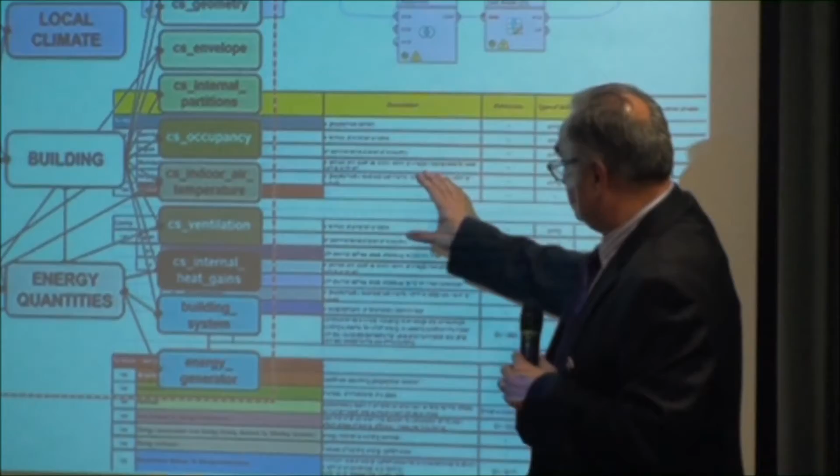Okay, this is just really to confuse you—to confuse you. This is the table where all the data is organized. We then semantically link this data through different ways and methods.

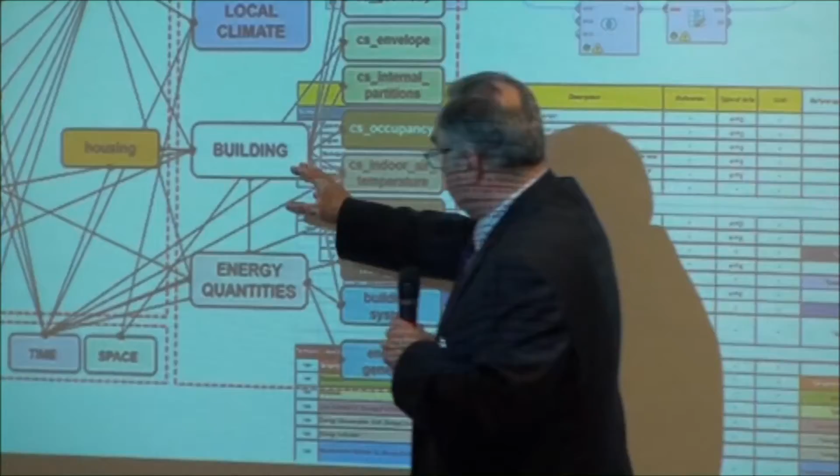So basically, for example, you've got the heart, the building. A building will have different geometries, different things inside it, different boilers, etc., that link here. This could be part of housing, which could be linked to data in terms of cost, population, etc. So the emphasis is on organizing the data first, and then there's an ontology editor that can put the data in and link it semantically.

So just to give you a quick example on the scope of input data required for estimation of SAP CO2 emission, for EPC rating—this is some of the work we did in Riverside Dean. For example, for all the houses, a typical property will have building geometry, different roof areas, height, etc. You calculate exposed wall areas, etc. We have more information like the age, boiler efficiency, location—so all of this is data that could be available somewhere.

For example, the boiler efficiency, the type of boilers, the property age, that will give me lots of knowledge about, for example, the type of walls that has been built, and building geometry and other areas.

So all of this really goes to something we call the ontology editor, which is what we call an ontology engineer that links the data together with the help of energy efficient engineers, or with the help of construction people, so these can be linked together.

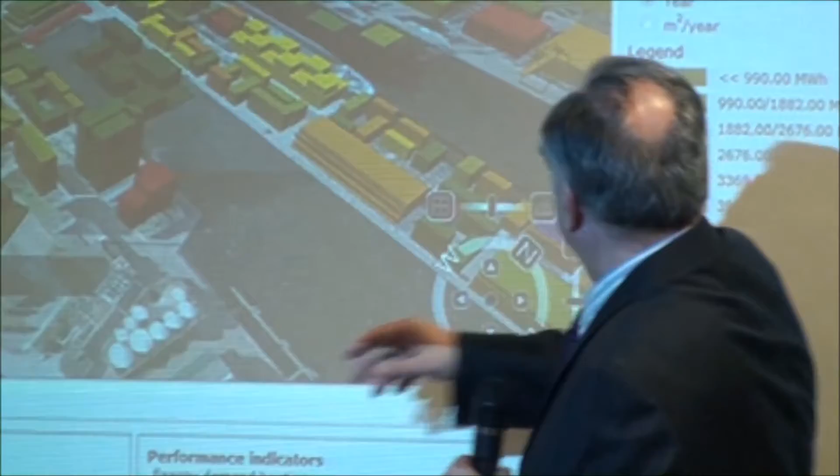This is in Copenhagen. You can see here, these are different objects, the buildings. The color will reflect, as you can see here, the megawatt hours in terms of energy, and you can highlight the high energy usage and how you're going to compare this. And therefore you can have different information, different graphs, and therefore you can have different strategies for reduction.

This is the Riverside Dean. Maybe David is going to talk more about this, but just to give you an idea, this is our LIDAR maps that we commissioned. There is the biomass plant in the middle here. Probably some of you will recognize this, and that's supposed to serve a number of Newcastle Park developments, in terms of the brewery, the Newcastle General Hospital.

That was the plan, but then we cleaned the data. We did lots of cleaning of the data. Some 3D models were developed. We've got some open source data that we developed from reading the LIDAR in terms of footprint. We purchased some master maps from Ordnance Survey. So there's lots of work being done.

The idea is to see how much we could capture data without having people involved and engaged all the time, so capture the data, put it somewhere in a public repository so somebody else might be able to use it. As you can see, lots of cleaning of the data, lots of modeling that we've done.

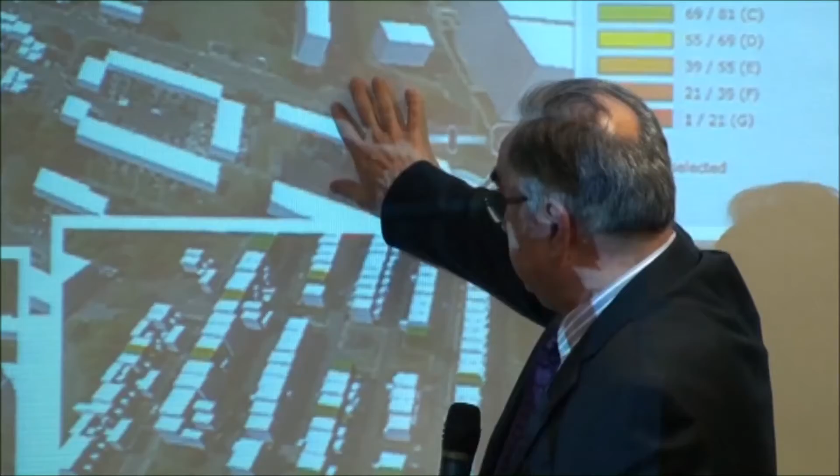So that is probably some of the intervention that we did. We had a bit of problems in terms of rating. We did some interventions, and as you can see, things turning green. Now, these interventions really, there's lots of cost analysis, lots of intelligent algorithms to tell me what sort of intervention has the benefit in terms of cost, in terms of the whole life cycle approach, in terms of the footprint for the calculation.

That could be done fairly easily if the data is structured, if the information is available, you can capture it and do the work. And I think this is in a nutshell what SEMANCO is all about, and I'll just hand the platform to David and Jim.

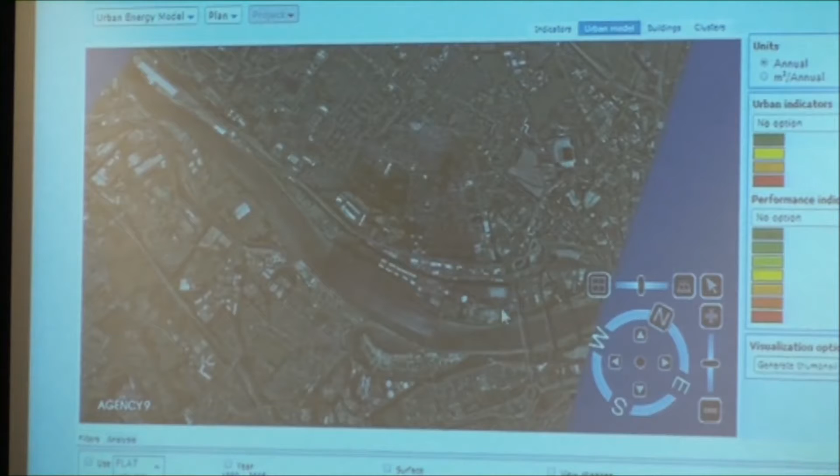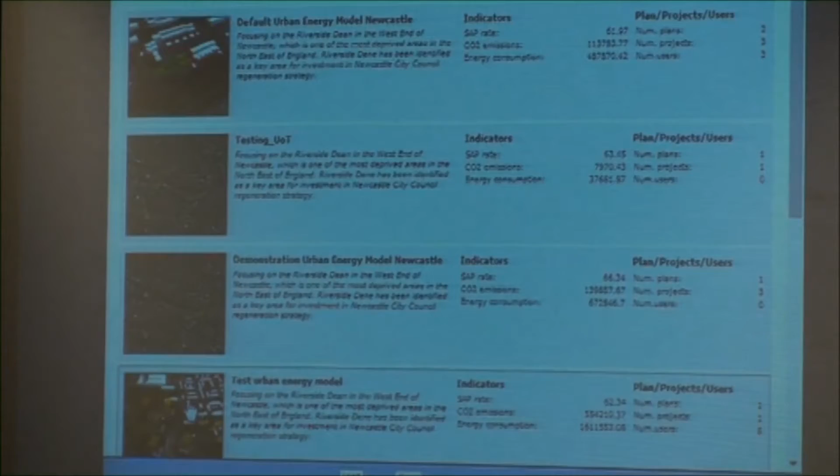What I can do is select one of the... well, actually what I'm going to do first is load a project. So here's, in the words of Blue Peter, one I prepared earlier. By loading the project, what that gives me is extra functionality to actually use the tool.

So when myself and Michael did the usability studies, we actually did some workshops around Newcastle, down in Leicester and Teesside, speaking to people like yourselves, and did a bit of a requirements capture. So what would you like to see on the screen? I've also been talking to representatives from universities, from local authorities, about if you were to use this sort of tool in your position, what sort of functionalities would you require?

So one of the things they might do is the energy manager may say, okay, I want to know about fuel poverty in the local area. So what I can do here is select fuel poverty from the urban indicator list. You can see we've got multiple deprivation, income scores, and fuel poverty. So I'll start with fuel poverty, and hopefully something should happen. Fingers crossed. Okay, that's good.

So very quickly there, with the data that we have on Newcastle, with the map, we can actually see very quickly an overview of fuel poverty across the city. And now what I can do is scroll into a particular neighbourhood, and in this case we're using Riverside Dean as the use case here in Newcastle.

And now what I want to do is... I know there's quite high levels of fuel poverty. I think it was orange kind of colour, so it means there's around about 18 to 22% of households in that neighbourhood are in fuel poverty. So I know that there are issues to do with the energy efficiency of properties in that neighbourhood.

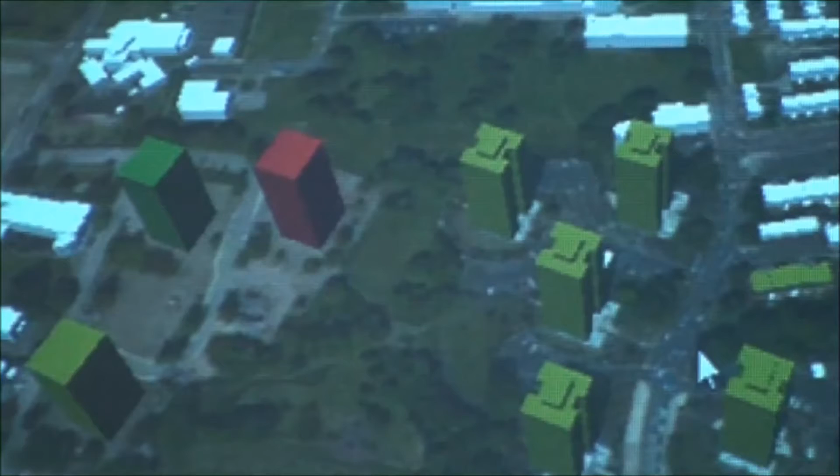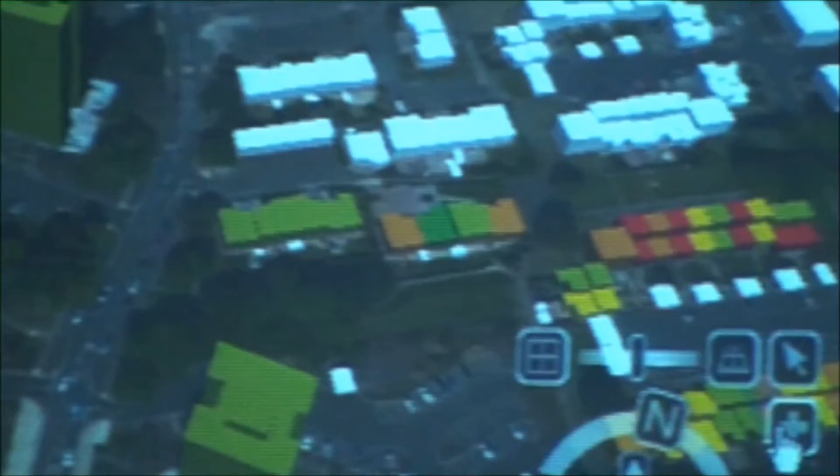And you can see that the newly refurbished tower blocks, nice green colour there, are very energy efficient. If anything, they're all complaining that they're too warm, I've been told, so it's quite interesting. And then what you can see here on the social housing areas, if you just drag the map, there are some buildings here with very, very low energy ratings, SAP ratings.

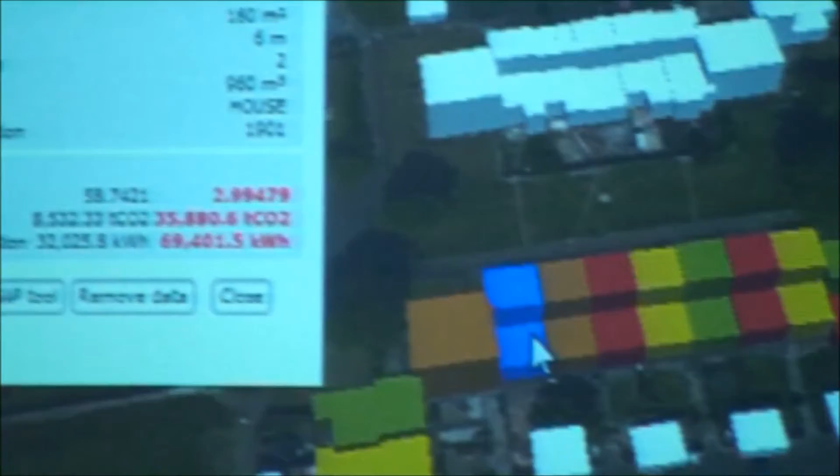So what I can do is actually select one of these buildings, click on it, and what pops up there is a nice summary. And I will say — sorry, the phone started calling someone there, sorry, get rid of that.

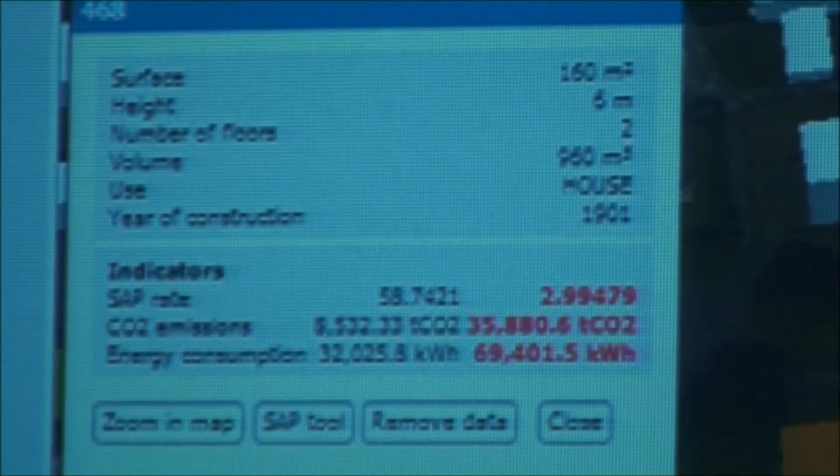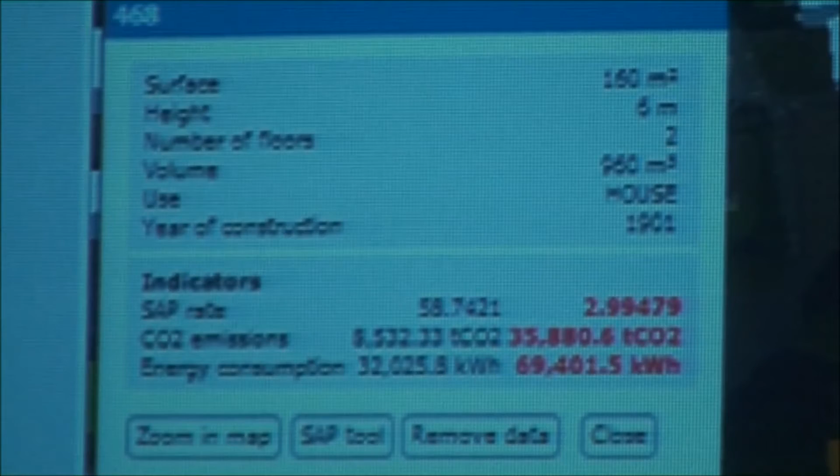What I will say is that it is dummy data at the moment. We are integrating data, but that's part of the development of the tool, so we're still working on that. So you can see here, it gives you a very nice kind of summary of the building in question — the surface area, the number of floors, the height of the building, that it's a house, and that it was built, according to this, in 1901.

And you can immediately see there the SAP rating is pretty low. So what I'm going to do now is launch a tool which is integrated into the platform, called the SAP tool.

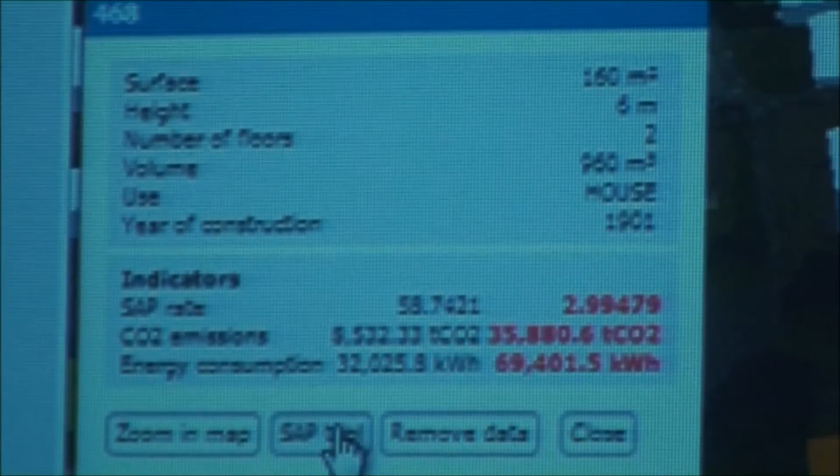So here we have the basic SAP data credentials for the building. I can see that overall it's got single glazing, so I'm going to increase that — I'm going to put triple glazing in there, bring that up to standard.

I'm then going to move across into the house data, and because I work for a local authority, we have no money, so what I'm going to do is all the easy fixes. We're going to add some wall insulation — at the moment it's as built, we're going to top that up, put 150 mil in there. I'll then move to the roof data, and I can see there's no roof insulation in there, so I'm going to maximise that to the limit, 270 mil on the roof.

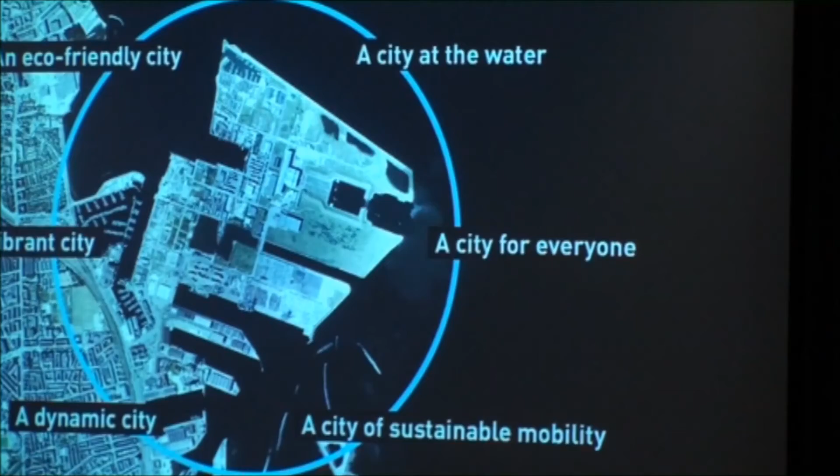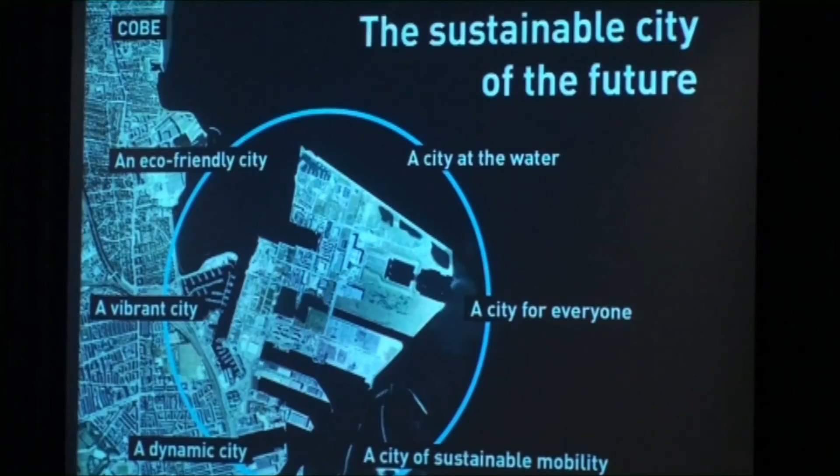So just to introduce the concept of sustainability when we work with it in Denmark and internationally, it's not just energy, it's not just transport. These are actually the things which are being discussed in relation to North Harbour. It's going to be sustainable in many different ways. It's going to be a city very near the water. It's going to be a city for everyone - this is where it becomes socially sustainable. It's going to be sustainable from a mobility point of view, so a lot of thinking into the transport systems is being discussed. It's going to be a dynamic city, a vibrant city, and an eco-friendly city. So these are the things we are discussing, and that's why I started by saying that this is a multidisciplinary task - it requires a lot of different competencies to develop an area as a sustainable area in the future.

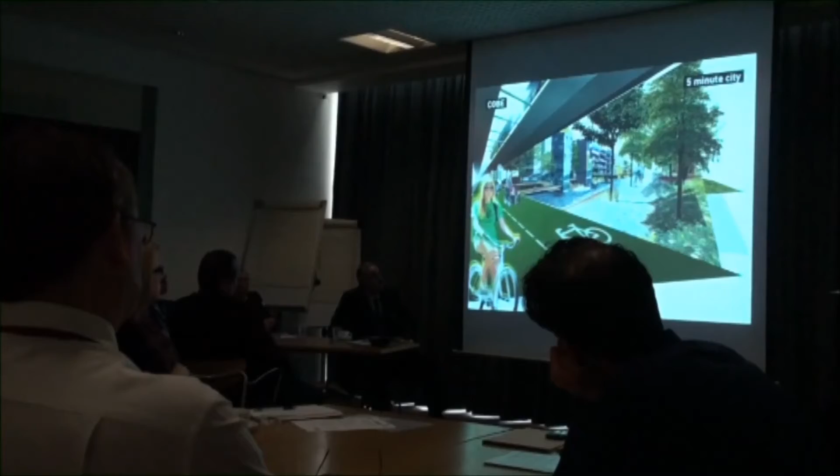From a transport point of view, it's going to be a 5-minute city, as we call it. The metro line is elevated, and this is what we call a super bicycle lane. So the idea is you could actually cycle from home to your workplace without getting wet.

So maybe this is something which could work for Newcastle as well. The idea is to make it comfortable for bicyclists to get to work, so this is being created. You might know that Copenhagen is number 2 just after Amsterdam in the field of bicyclism, so they're trying to promote that.

So this was just a bit about the area. Now getting to the energy part, which is my expertise. The vision from the beginning for North Harbour was that it should be a CO2 friendly city near train stations, instead of us getting into cars every morning and driving for an hour to get to work. This has actually been the reason why the Ramboll head office has been built where it is today. So you need to think about that before building the office.

Another special feature about the city of Copenhagen is that 98% of the heat supply is being provided by district heating. The district heating tradition in Denmark has been developing for the last 30-40 years, so most of Copenhagen, which is more than 1 million inhabitants, is being provided by district heating, which is very environmentally friendly. The regional finger plan for the area also supports a high rate of public transport. As I mentioned, there has been years of tradition of bicyclism, so that's how it is today.